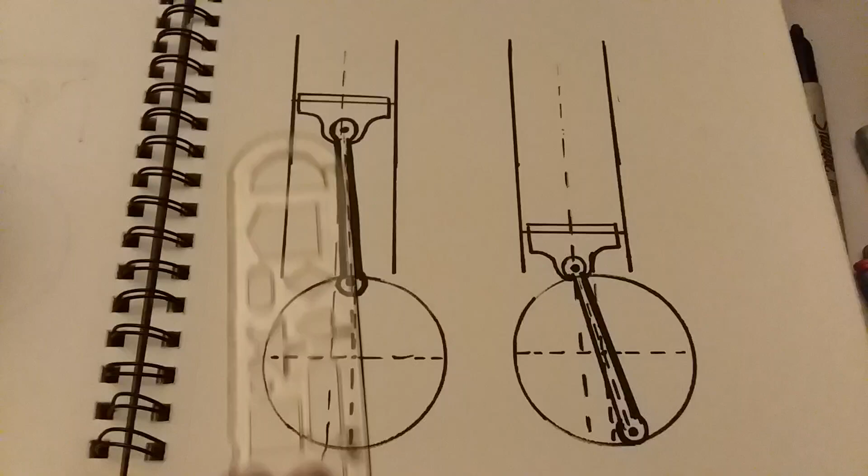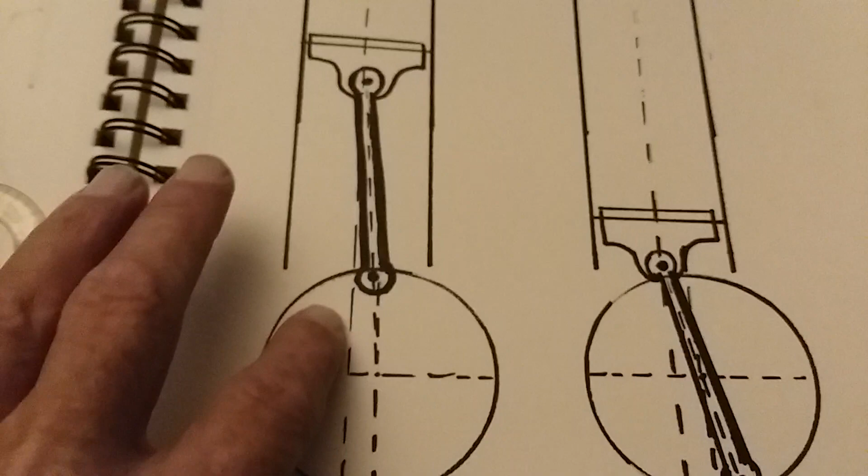Okay, so I tried to make a diagram to explain what I was talking about in chat earlier tonight in case some of you guys didn't get it. This is an offset cylinder. It's offset to the left from center. This is the center line for the cylinder. This is the center line for the crankshaft. And here's your piston rod.

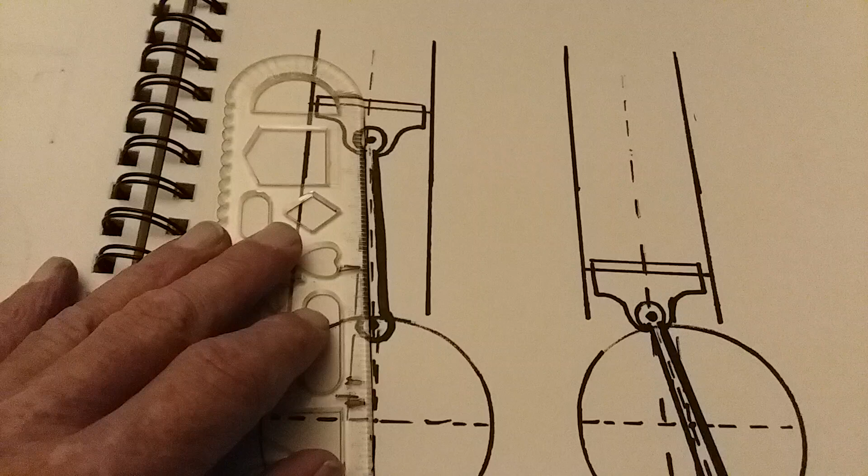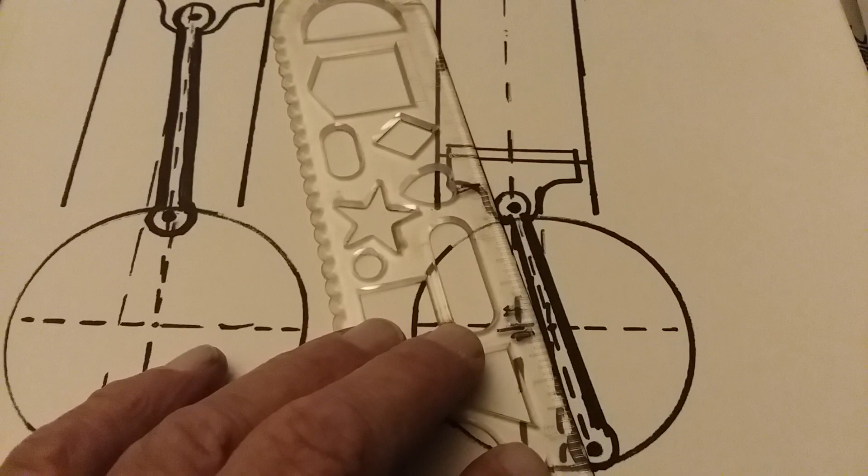So at top dead center, the rod's going to be fully extended and straight with the center of the crankshaft, right? So that's off a degree and a half. Okay, so no consequence there. But when it comes down on the power stroke, you're going to wind up at bottom dead center. You're going to wind up about 2 or 3, 4 more degrees depending on how much your offset is and the length of your piston rod and so on and so forth.

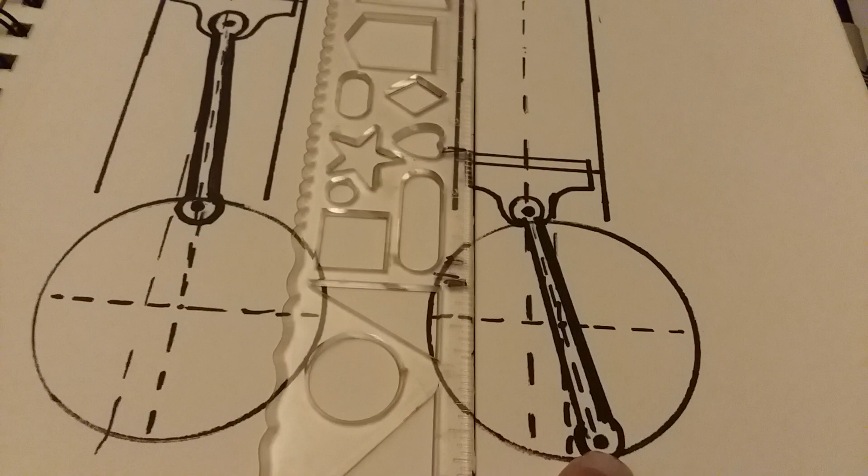Length of piston rod is a whole nother deal. There's some videos about that out there too. But you can see the piston rod here, the crankshaft at the bottom has to travel another 3-4 degrees because the piston has been offset to reach bottom dead center.

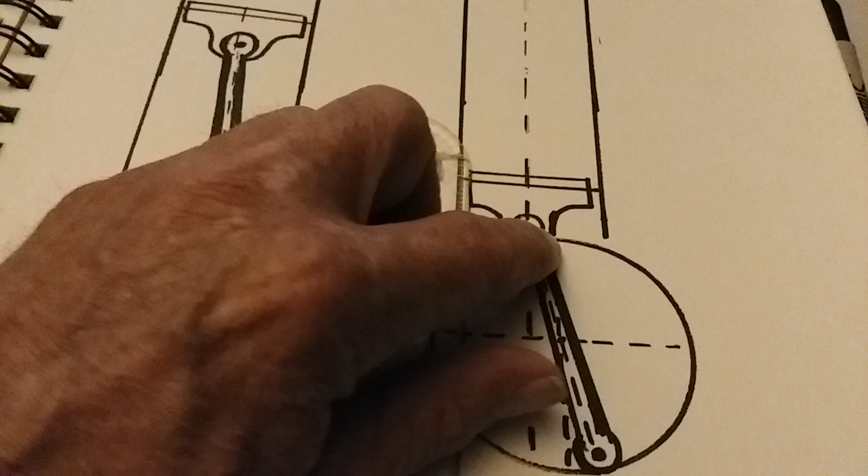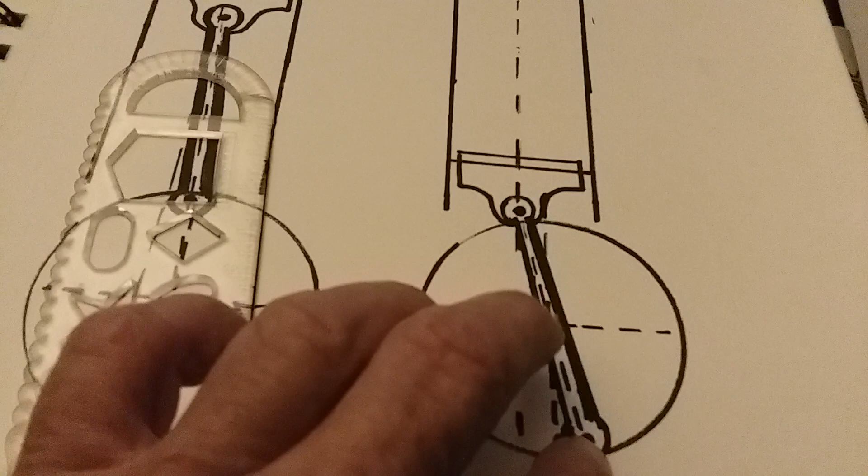So essentially what happens is that the piston spends longer time coming down because the crankshaft has to travel a couple more degrees to get to bottom dead center than it would if it were directly above. It would be 180 degrees travel if it were directly above, but because it's off-centered, the travel from top dead center to bottom dead center is going to be plus 180 degrees. Which means your piston is going to take longer to come down.

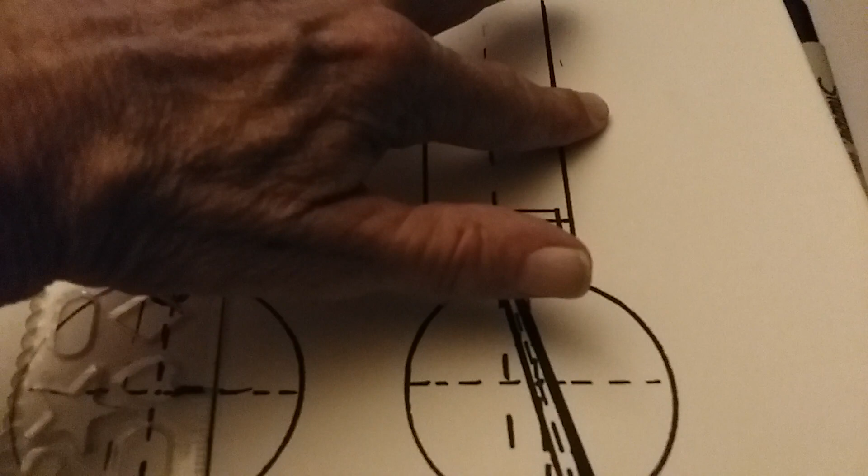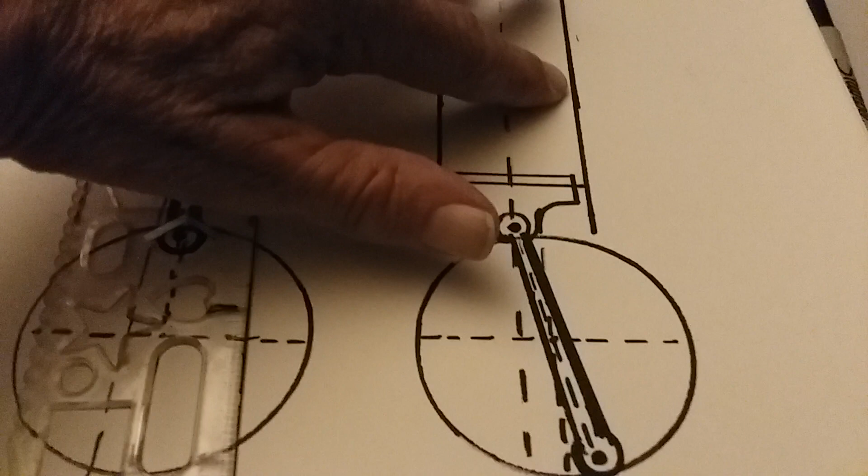And say you have a port here that's open and you want to increase the duration on that port, you can offset the cylinder to one side, and that's going to increase the duration on that port. It's also going to affect the timing of when it opens and closes. And then conversely, on the other side of the cylinder where you have your other port, it's gonna shorten up the duration for that port being open, because the crank is going to travel less now.

It's going to be 180 degrees minus a few degrees to get from bottom dead center back to top dead center. It's going to wind up being 360 degrees either way, but this side will take longer and this side will take less time. So I don't know how you can take advantage of that theoretically, or not theoretically. It's all theoretical right now.

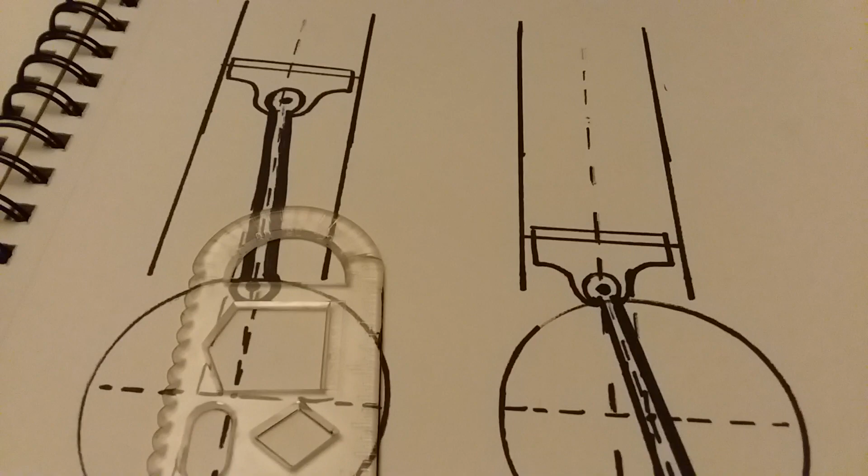It's going to take a lot more math to work out how this could be taken advantage of, but I'm just saying that there could be some potential here. It's worth looking into. If you've got a block of aluminum and you're hacking out cases from scratch, designing your own shit, might be something to look into.